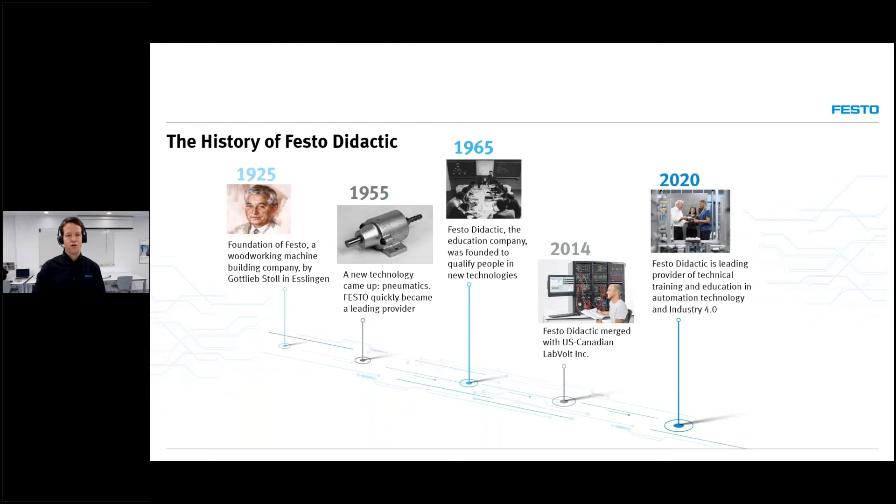More recently, in 2014, the US-Canadian LabVolt and Festo Didactic merged and became one company. Now in 2020, our portfolio looks like this.

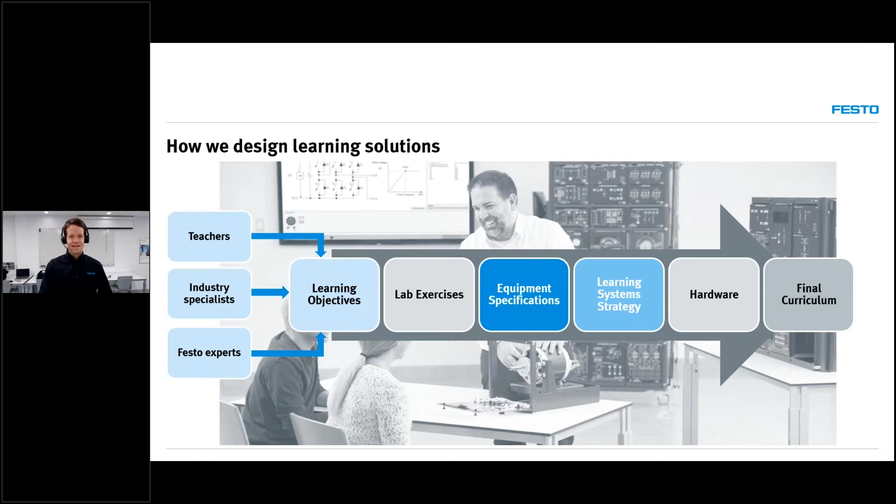We ask that students and teachers read them before they start the measurement exercises, followed by the process control exercises or the advanced process control exercises. As you will see, we have many options with the system here, that's why we have optional manuals to go with these different options.

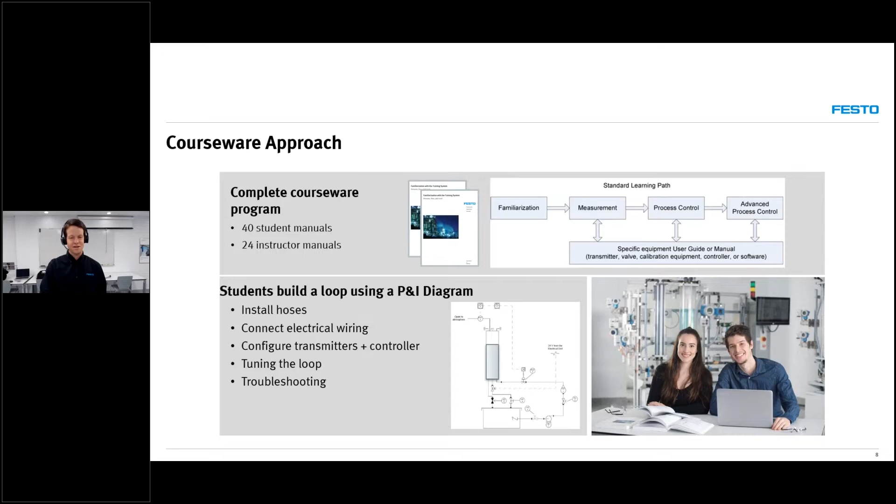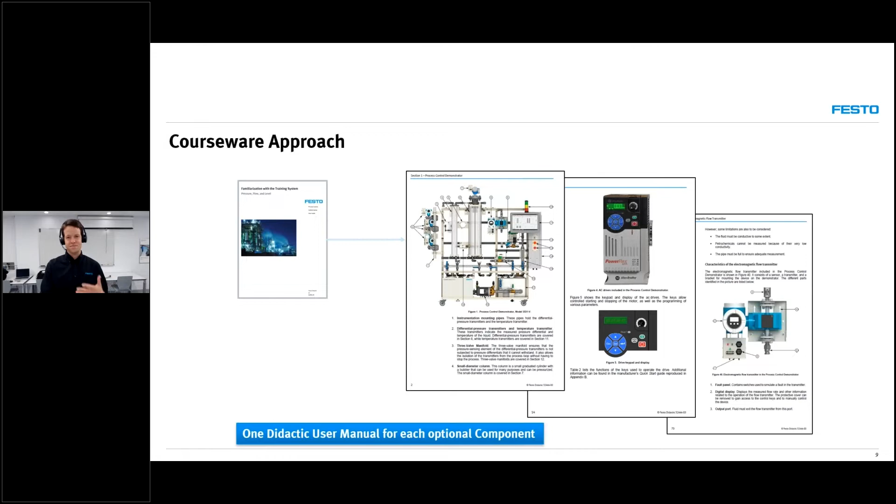This is an extract from one of the familiarization books. It's to show you the level of detail that you can expect from such a book. This one is showing the drive and one of the transmitters, and you see that everything is well laid out. It's much easier to read like this than using the original manufacturer's books.

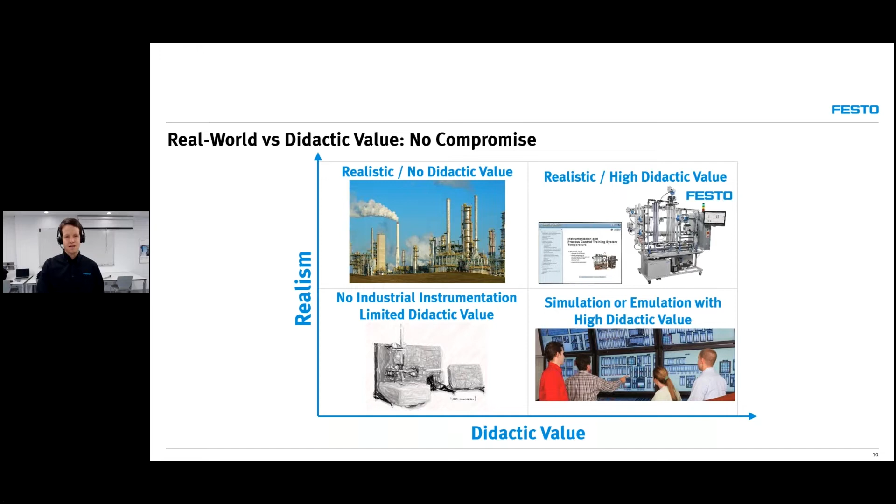From the beginning of this project, the team wanted a realistic system that was easy to work with in a learning environment. Sometimes you have one or the other, but we wanted both. We didn't want just a simulation, and we didn't want to go to a plant and work with real equipment in operation in a distillery per se, but we wanted the industrial feeling anyway. So that's why we came up with this solution, which is realistic and didactic, has a high didactic value.

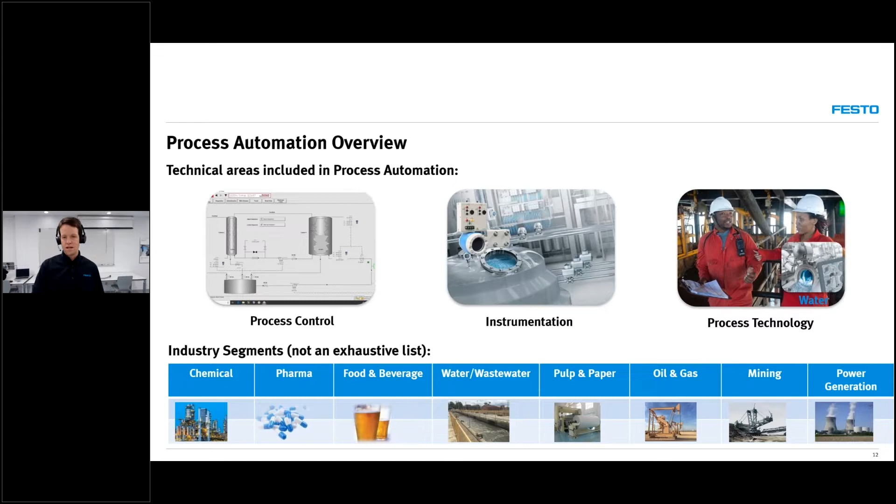Now let's explain the concepts of process automation a little bit, because you may not be all that familiar with process automation. There are three main technical areas in which workers can specialize: process control, instrumentation, and process technologies such as the use of water. Some industries that rely heavily on process automation are listed below, this is just a couple of examples. Beer companies are one of such industries, and power generation companies too, of course.

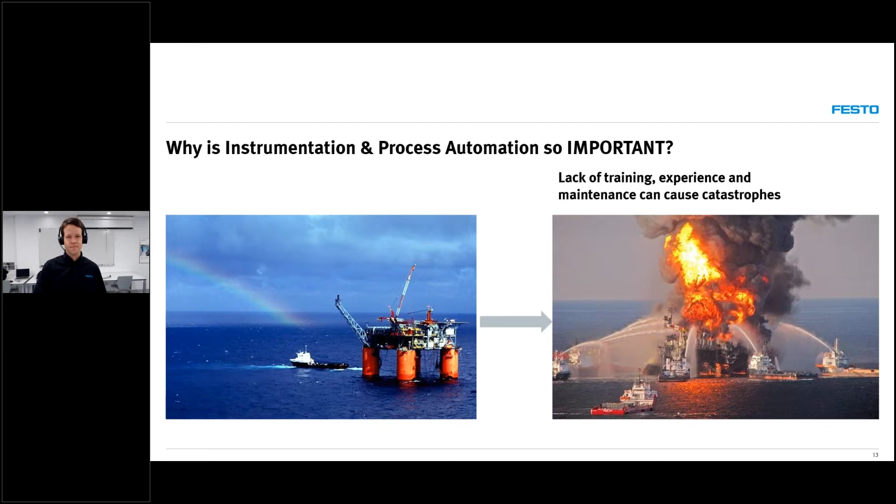Sometimes we're asked, what's the difference between process automation and factory automation? In general, with process automation we're more concerned about analog signals compared to digital signals. The response time is slower in general. In process automation, we use pressure, flow, level, temperature transmitters, pumps and control valves. Whereas with factory automation, we're more concerned about digital sensors on the drives, motor drives, the magnetic valves, and it's more of a sequential control as opposed to continuous control.

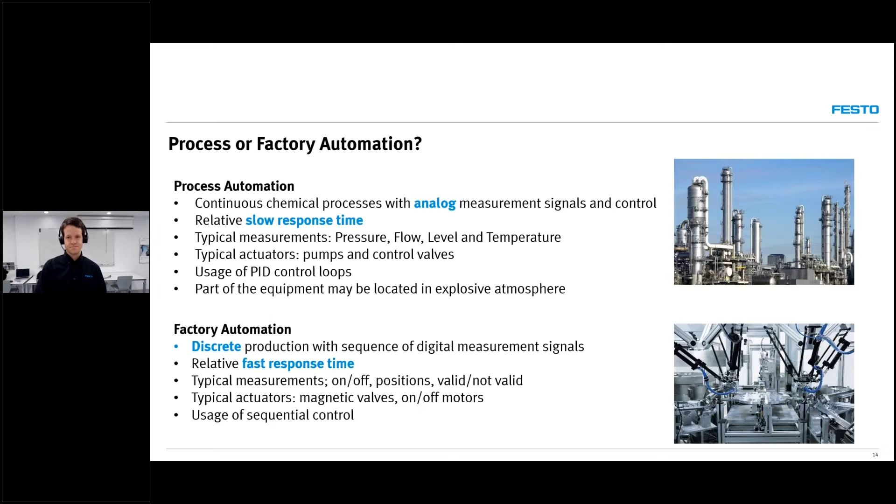Now we're going to start a video that tells you a little bit why a student should want to learn about industrial instrumentation technology. It will be just...

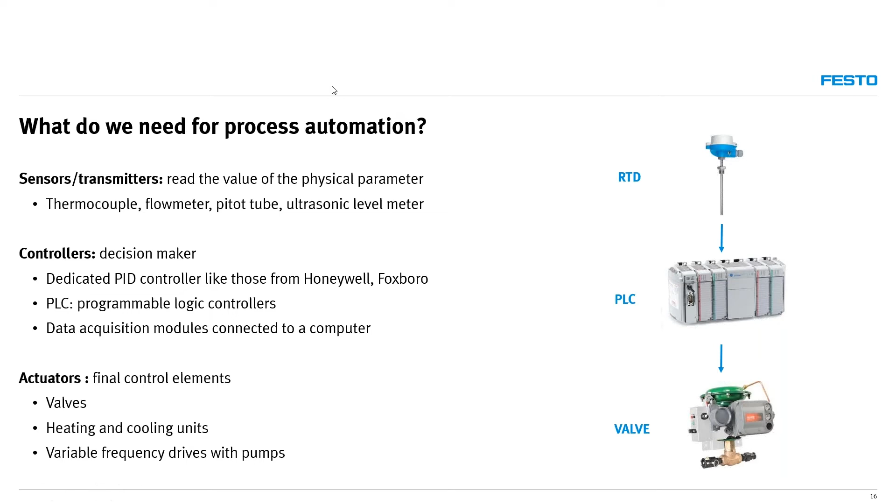Gonzalo, you seem to be busy. Do you have any questions that may need some attention from us? Just only have standard questions about sound and audio, and everything is okay for the moment. Okay, so we'll keep going. If you have problems with the audio or the video, sign out of the webinar and please come back. Normally this resets the audio and the video and they start working. We have around 5 to 10% of the computers of the attendees that normally don't work. It's something about Windows, sorry about it. We can call Bill Gates to solve this problem. Keep on going, François Xavier. All right, thank you, Gonzalo.

If we want to summarize what we need for a process control loop to work, there are 3 key elements.

First one is sensors and transmitters. You have an example here with the RTD.

We also need a controller to take a decision. It can be a dedicated PID controller like the Foxboro, a PLC, or a computer-based controller.

Finally, we need an actuator. In our case, we use valves. We also use heating and cooling units, and variable frequency drives with pumps to have a different flow of water.

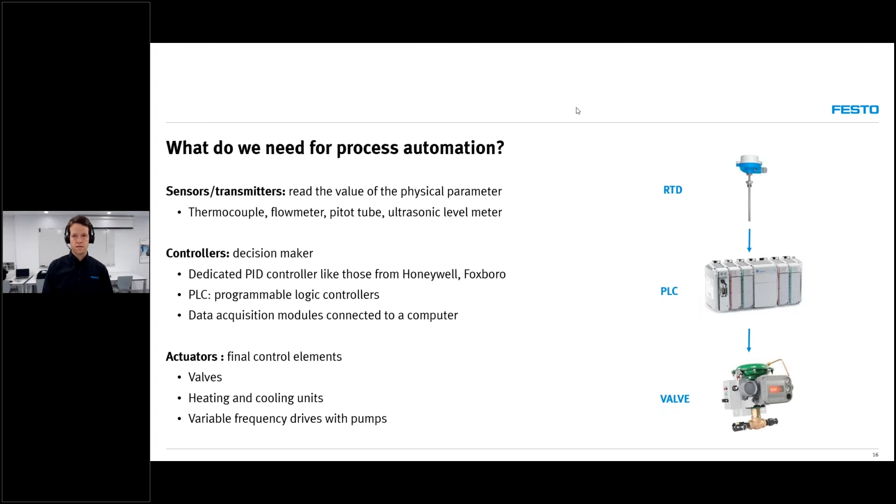Now, if we want to modelize the control loop, there are 3 main parameters to consider: the set point (SP), the process variable (PV), and the controlled variable (CV).

If we take a level loop as an example, if we measure the PV, which is the first step, the PV can be the level in the tank.

Then we need to compare that PV value to a set point and calculate the error. In that case, when we have a level process, we want, say, 50% of the total height, but we're at 40%, so there's a gap. That gap is our error.

And finally, we need to take action. The controller will send a control signal to the control valve to open up a little bit more so we can reach that desired level of 50%.

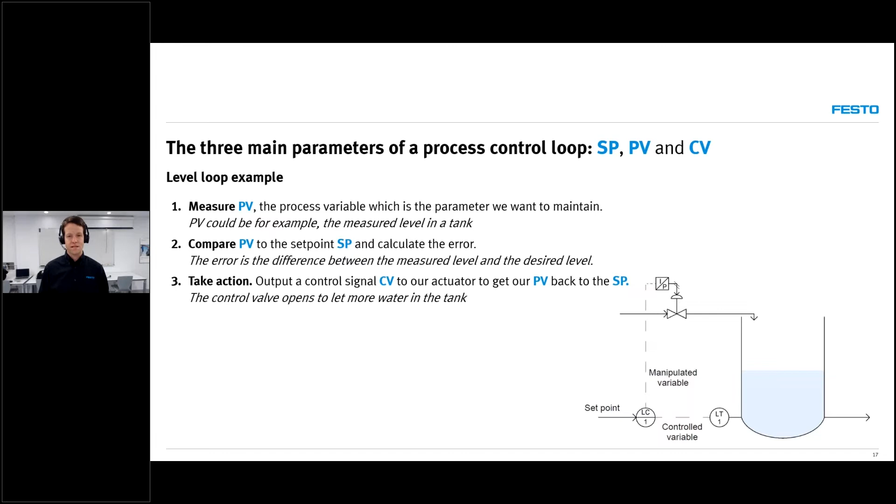In this case, it's a valve that will be opening, and the opening of the valve has an effect on the process, and in turn, the process variable will change with time, and hopefully we will reach our set point.

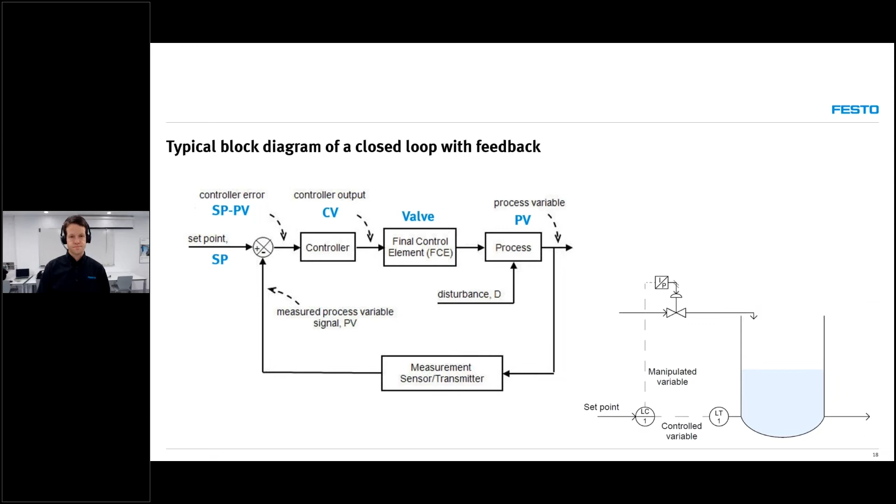We have another video here showing you the daily job of an instrumentation technician. If you just give me a little second, we will start that video. It was shot in Cold Lake, Alberta, at the Imperial Oil facility.

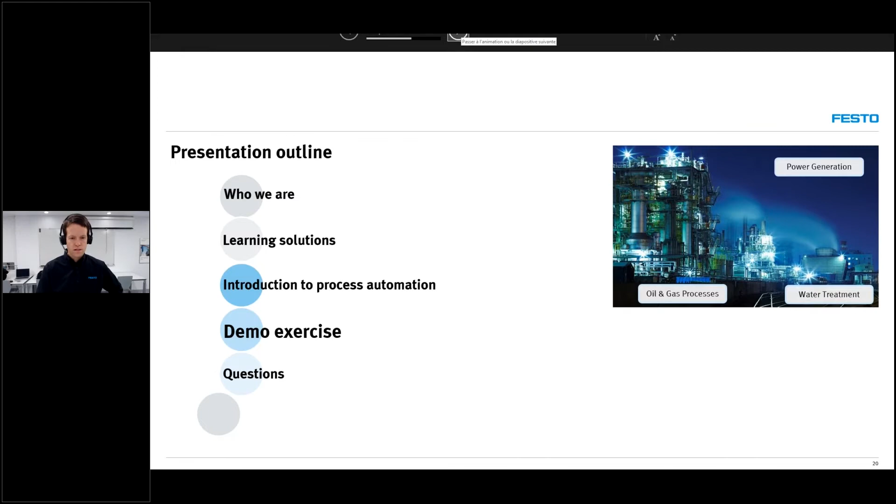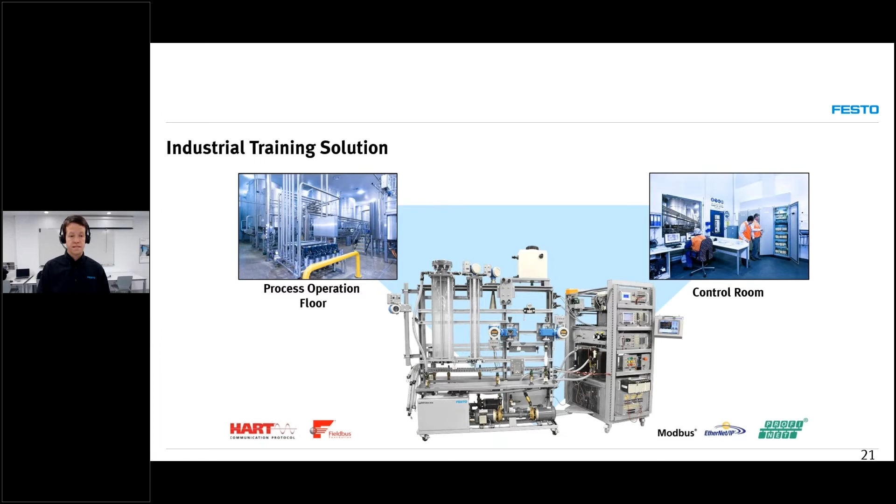Let's take a deeper look now at what we have for components. We will be using some of these industrial components shortly.

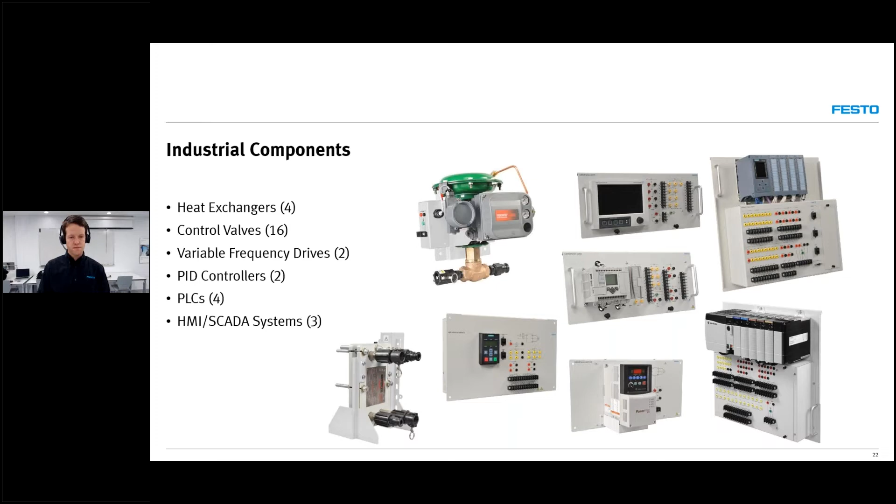The valve in green from Fisher, we will be using something similar to that. We will also be using a variable frequency drive from Rockwell, as well as Compact Logix PLC. But you see that there are other options for control if we wanted. We just wanted to keep it simple for today.

In terms of transmitters, we will be using the one on the top left corner. It's a versatile differential pressure transmitter from Endress+Hauser.

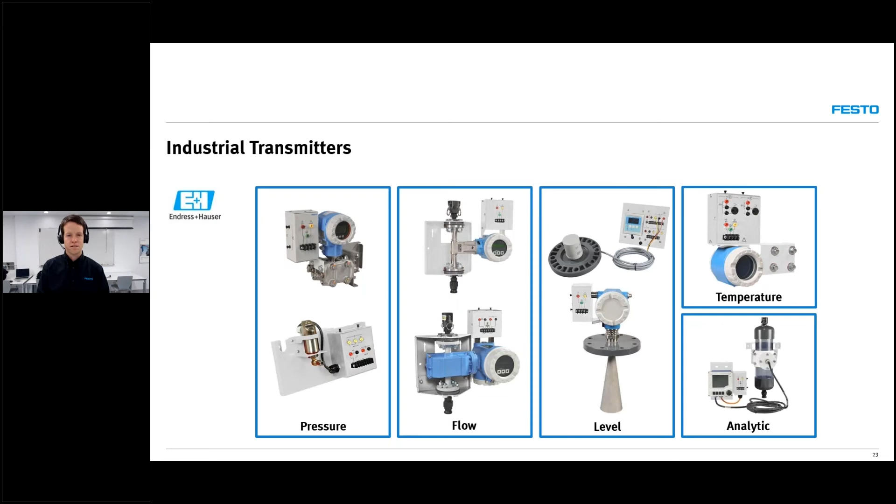What we do during the exercise, we have different steps to follow, all laid out in the books. Step one is usually setting up the hose connections according to the diagram you see on the left, and on the right you see what it should actually look like when the hoses are connected. Our goal is that students can read the diagram and apply it to the system.

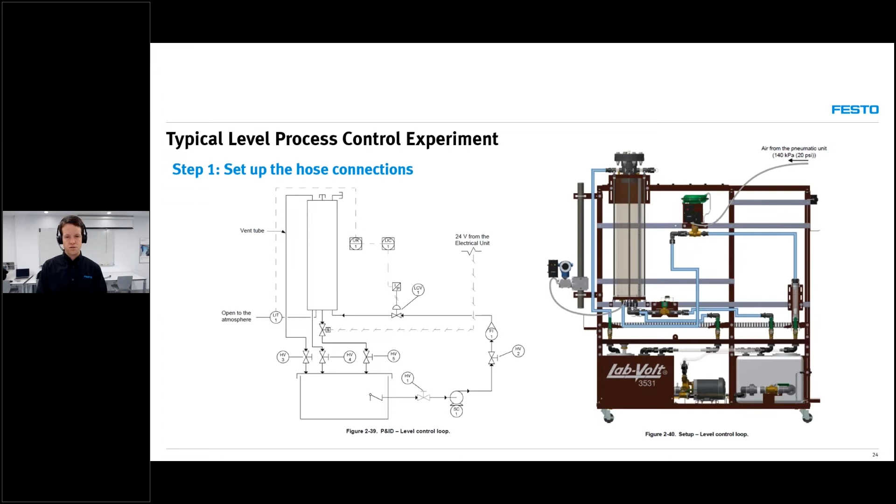Our second step will be the wiring, the electrical wiring and configuration of the differential pressure transmitter. The electrical connections are shown on the left. You have a diagram first, and then more specifically the connections for the differential pressure transmitter and for the valve. I will ask Gonzalo to turn on his webcam so we can do a little tour of the station together.

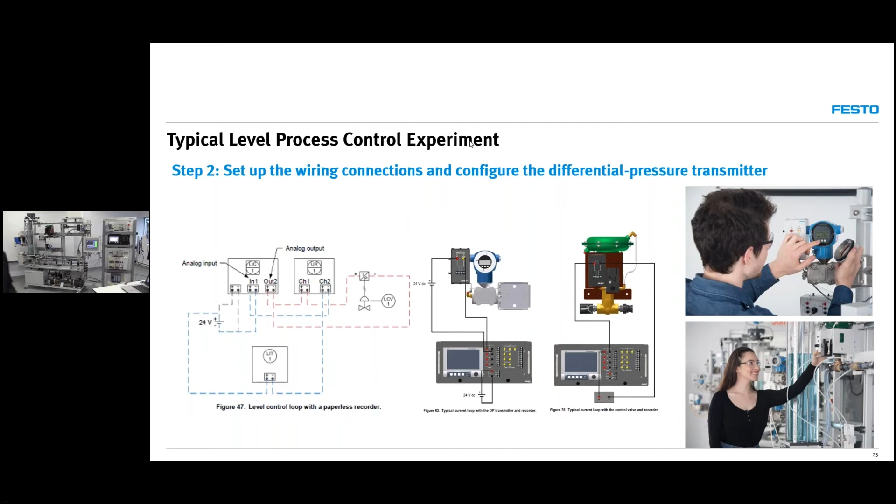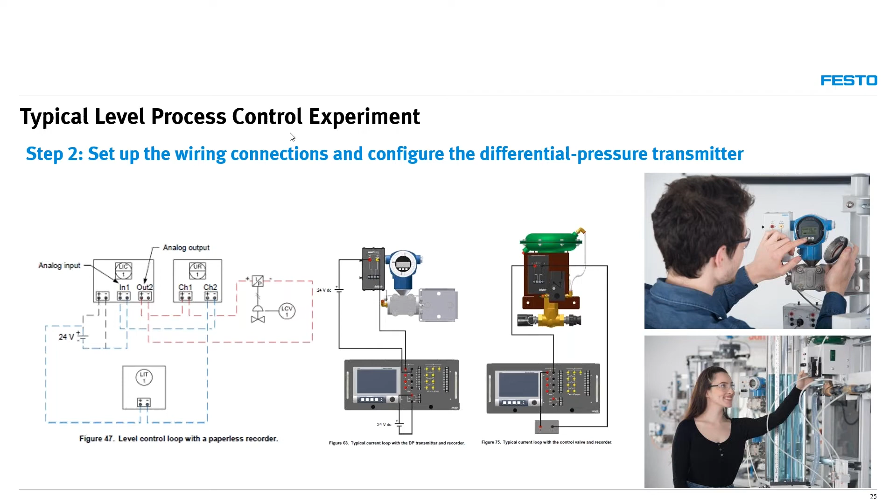All right, now back to my slides here. I hope that you can see. These were steps 1 and 2. Step 3, we will start the drive. We will adjust the parameters. We will check the stability of our control loop by changing the set point, and we may or may not create a disturbance by changing the pump speed or choking the manual valve, maybe HV2, the hand valve number 2.

The difference: it will still be a PID control, but the way it's calculated will be different. And if you want to play a trick on Gonzalo, hit the PID disabled, and next time you use PID loop 0, it will not be working.

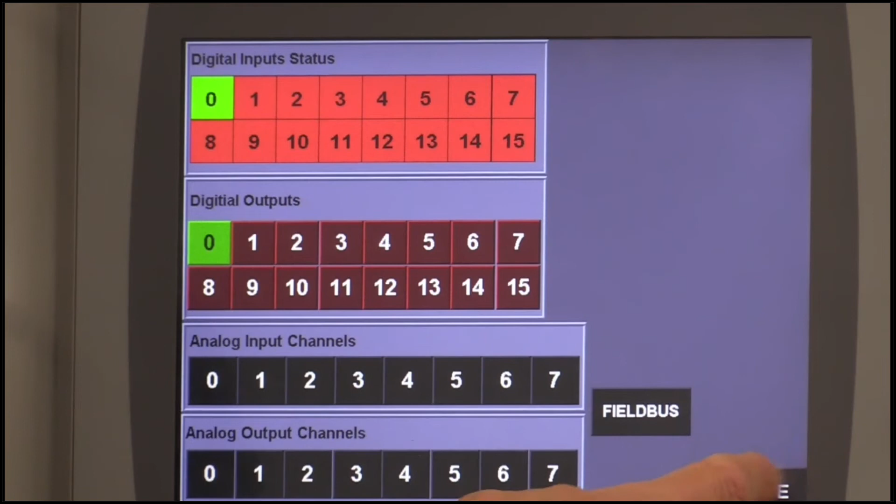We can have two drives working simultaneously; we just have one installed, drive 1. We can look at the different PID loops. We can access all the inputs and outputs, whether digital or analog. And we support field bus communication, HART communication.

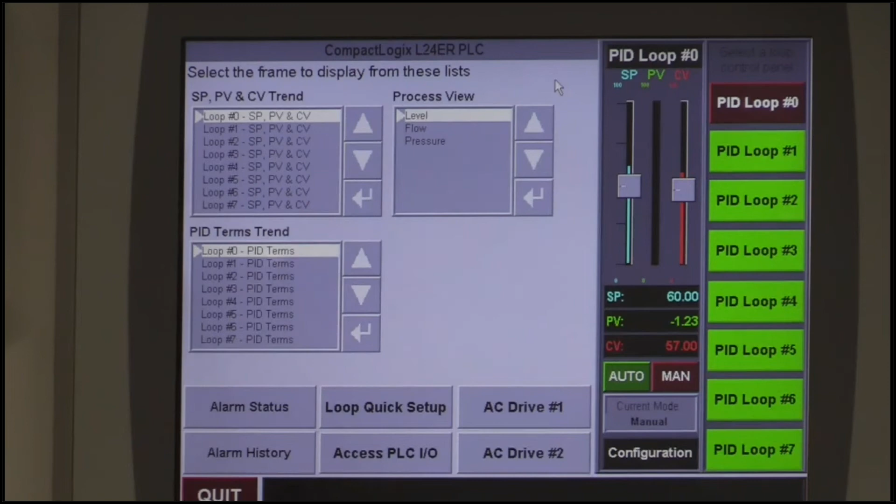There's a way to have fun for a couple of days or weeks or even months playing with this interface. So that sums it up, Gonzalo, unless you have something else to mention.

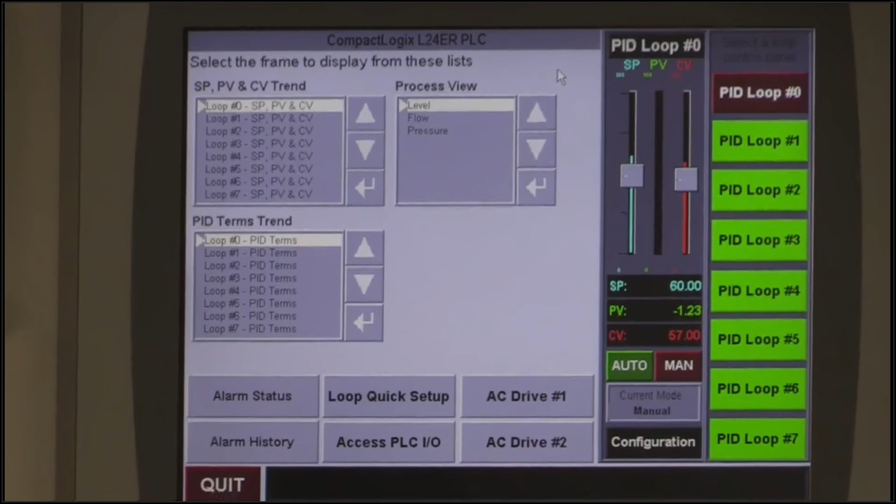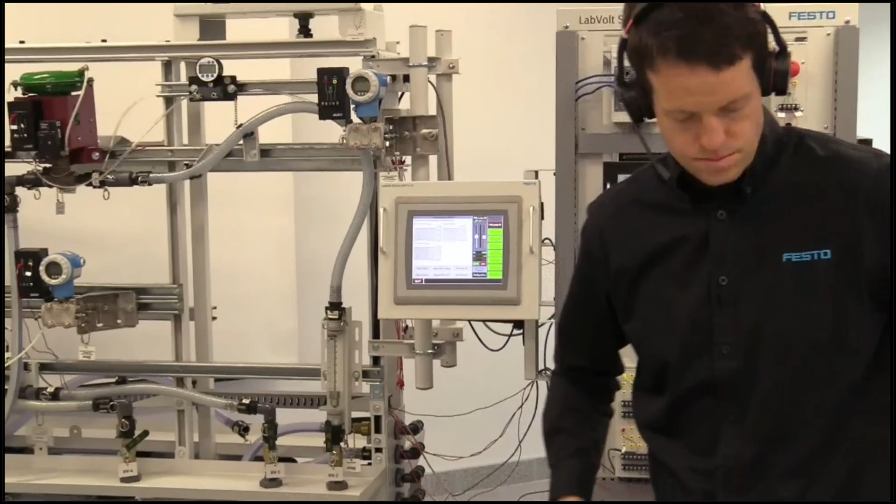Yeah, I think we have done a quick tour about the system. So, as Francois Xavier was mentioning, we have the system, and this system can be loaded with several different kinds of equipment. We can have Siemens PLCs and touch screens, Allen Bradley PLCs, and of course touch screens. Also, in the system, we can have different configurations.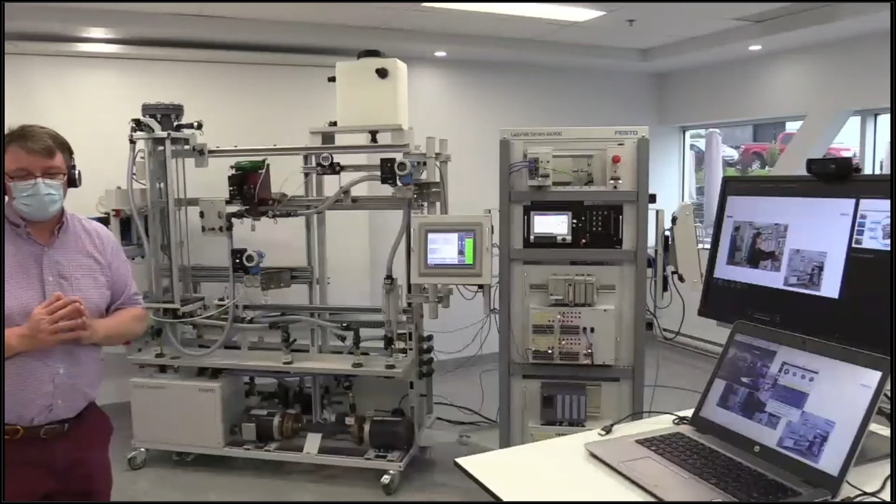For example, here we see the metering pumps that we can use for pH and temperature process controls. So there's a very large variety of elements we can load in the system depending on your needs in education, so we can fit and load the system exactly to fit your program as much as possible, with different kinds of sensors and valves. Our goal is to match our system with what is most useful and most normal to see in the industries around your school.

Yeah, some say it's extremely modular. It is extremely modular. All right, we're getting to the end of the presentation.

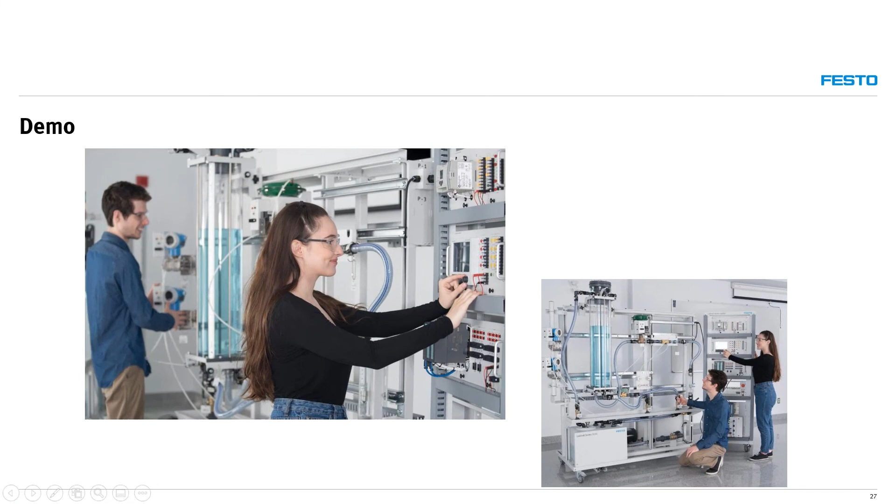Now that the demonstration is made, if we want to summarize our didactic solution, we can say that it is supported by an extensive curriculum based on realistic industrial situations and fostering troubleshooting skills. The system is of industrial grade, modular, and expandable. Finally, it's safe and supported by a strong team for years to come.

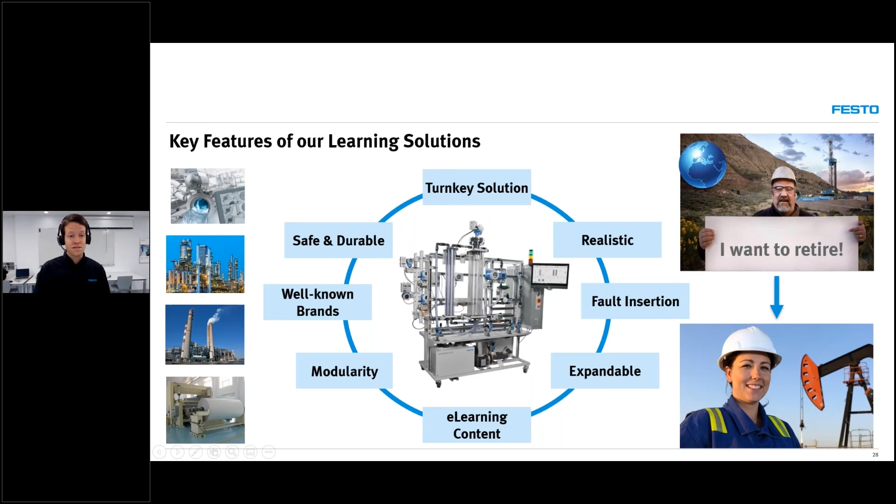And now is the time for some questions. And since we have Stefan on the line, he can show his camera, and together we can answer some of your questions. Hello, Stefan. So here we have, I was gathering some questions for you. One of the first questions is, what is the advantage of using a DCS compared to a PLC?

So in the past, if we look back 20 years ago, the PLCs were not programmed the same way as they are now with DCSs. The big difference with DCSs is the way to program the controllers. So Rockwell now has developed libraries to be able to program the PLCs similarly to how you program other DCSs like DeltaV DCS or the PCS7 from Siemens, using a similar block approach. So now PLCs are very close to the DCS approach that we used to have in the past.

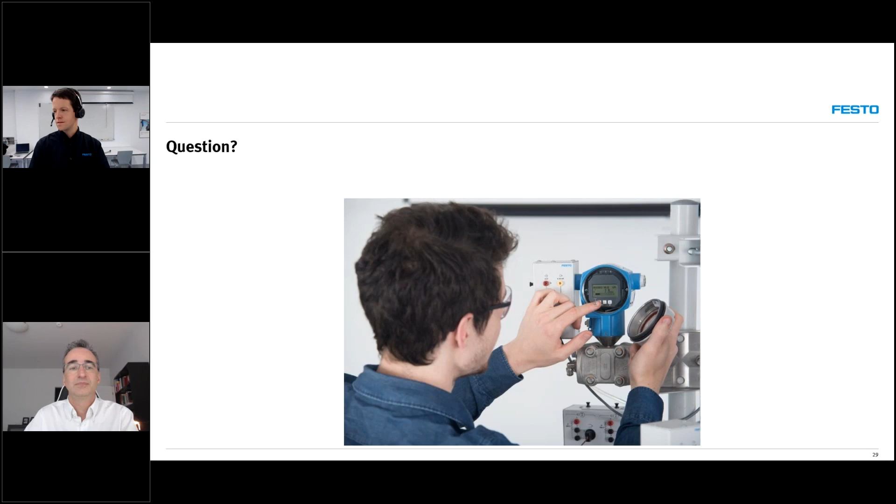I want to remind you that Professor Xavier mentioned during the presentation that our system comes with around 40 books depending on configuration, always including a student book and a teacher book. The way you teach the classes is well laid out in our books, so at least for the first sessions using our system, you may stick to our manuals. We guide students step by step, starting from very basic concepts up to a very high level. Once you get used to the system, you can start making your own labs.

So it's a turnkey solution for most schools. Sometimes people order samples of the books so they can read through them and see if they match the requirements of their school or program. That's something we can do, just write to the services team and we'll gladly respond.